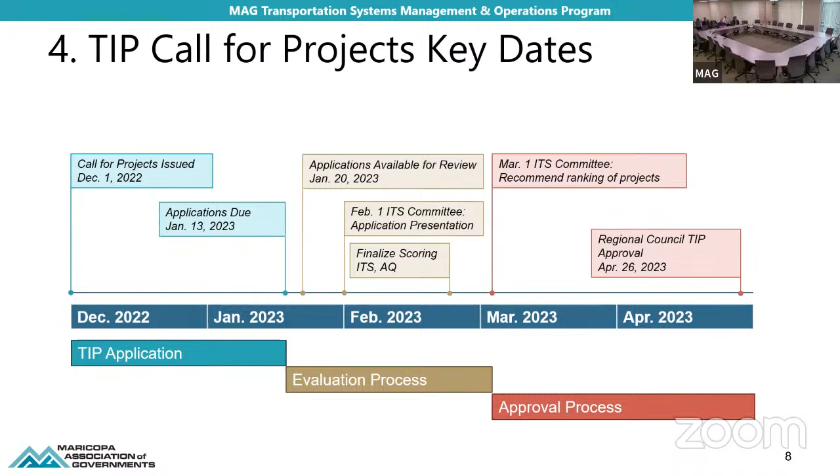The next item we have is our ICM planning study. We did provide an update last month in terms of what we are anticipating for our ICM, or integrated corridor management planning. We've had this funding available for planning studies, and we're taking a two-phase approach, where phase one will help us better identify feasibility of being able to do ICM projects or planning for those. And that could include signal timings and rerouting, a concept of operations type of approach.

But we also want to learn from taking a feasibility scan through the region to see what makes the most sense to do, as opposed to self-selecting corridors. So what we learn from phase one will feed into phase two, which is really the planning and executing of these type of planning projects.

We've currently developed our phase one task order, and we're waiting for final signatures on that. So that should be ready by the January committee meeting to discuss. But that project will be a very quick turnaround, and it's just a data scan. What goes into that task order indicates the three major tasks of this scope of work, or this upcoming task order.

Task one would be a regional assessment, just taking a look at it from a data perspective, both regional data as well as some safety data. Looking at the region, snapshots over time of what the data indicates in terms of hotspots or areas we want to be aware of from freeway and arterial management.

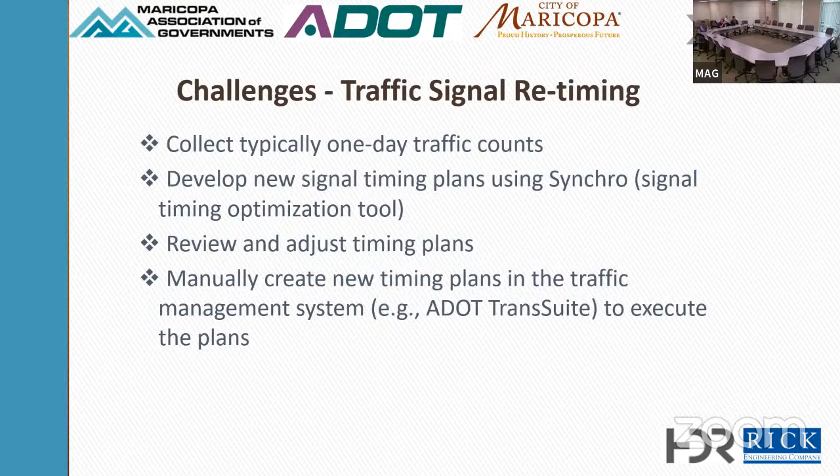So as part of the MAG Emerging Technologies pilot, this solution was looking at something that can help with this.

So what is this technology? Well, in the MAG region, you have four types of signal control. You have some signals that run free, some signals that are traffic responsive and use things like dynamic max green. And most of the signals, about 90% in the MAG region, use time of day coordination, and about 10% are adaptive.

So this technology sits right under the time of day coordination, in the sense that it is continuously collecting turning movement counts for you. It gives you the tool and the ability to optimize whenever you want, but it still gives you time of day coordination, and it's not making any decisions for you automatically.

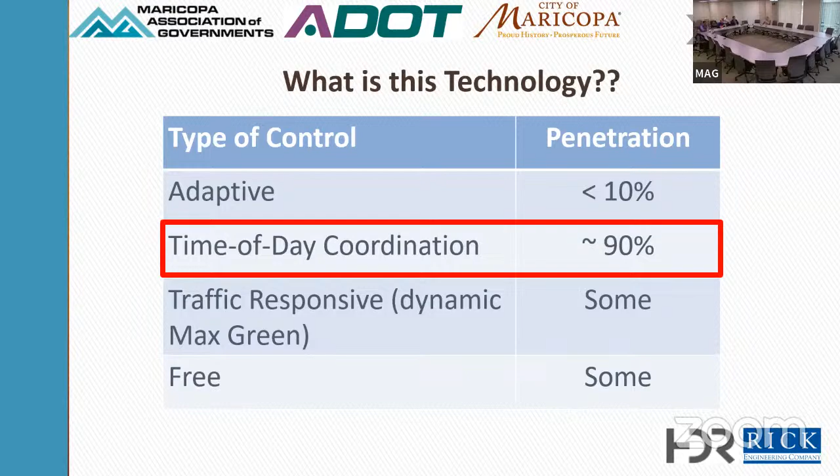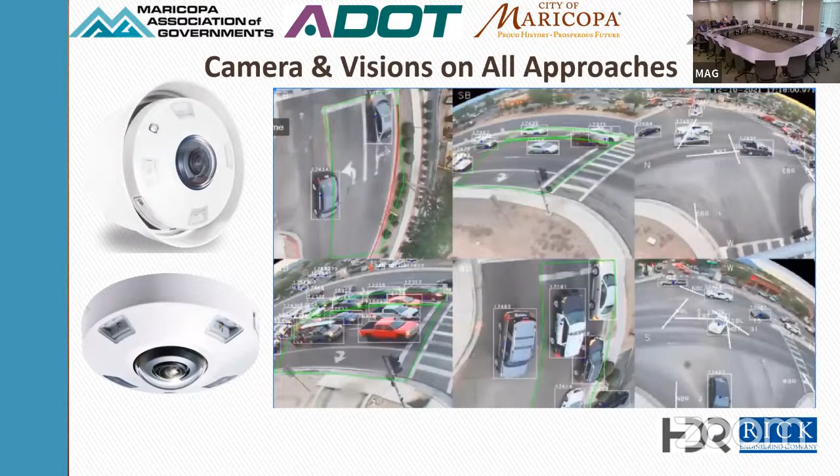So this technology uses camera and vision on all approaches to set up detection zones and track vehicles and objects. It's all powered by a main GPU unit connected in the traffic signal cabinet. This unit processes and stores the continuous traffic counts and is connected to the signal controller as well, giving you the ability, and ADOT in the case of our project, to automatically implement the timing plans remotely.

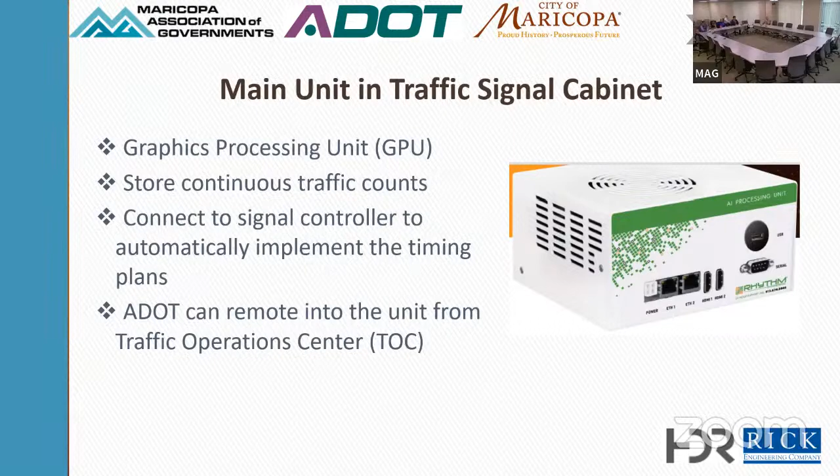This Code Green software that comes with this technology and these devices is like a signal optimization tool, but on steroids. First, you're always getting the continuous turning movement counts imported into it, so you're able to compare, identify when your peak periods are, and notice if there are any changes that happened that you might want to make adjustments to.

You can also monitor the cameras at the intersection directly from within the same software. On top of that, it has the signal optimization tool built in as well. So you can simply select the period you're looking to optimize, or even better, now that you have continuous turning movement counts, you can average a few days together to present a clear vision of what's happening in the corridor over time.

So once you build the model, and in my opinion building the model in this software is much more intuitive and easier, you can just click the calculate button to provide you with a signal timing plan. In the case of this project, we were actually evaluating just the signal timing plan generated by the software without doing any manual adjustments to it. The only adjustments we did were revising the speeds based on what's happening in the field, and that's it. No changes to the time space diagrams or anything of that sort.

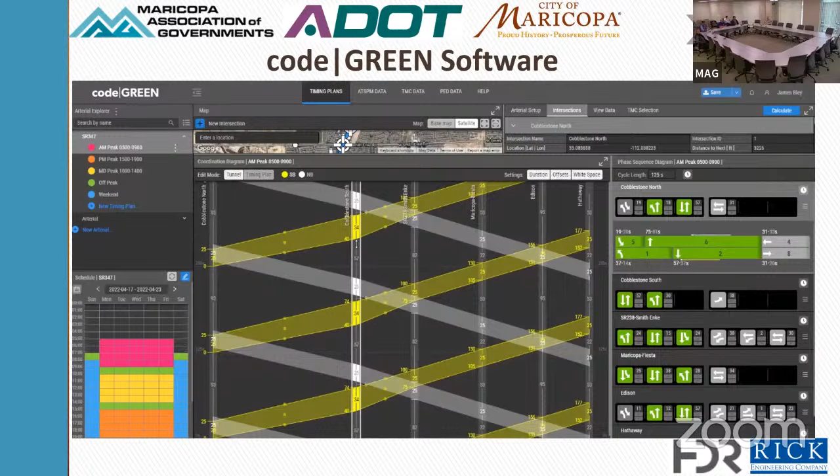So to summarize, this technology is AI-based cameras that count turning movement counts continuously. It has a module to generate time-of-day signal timing plans for you, and then a module to execute the signal timing plans. Kind of a one-click TSOP.

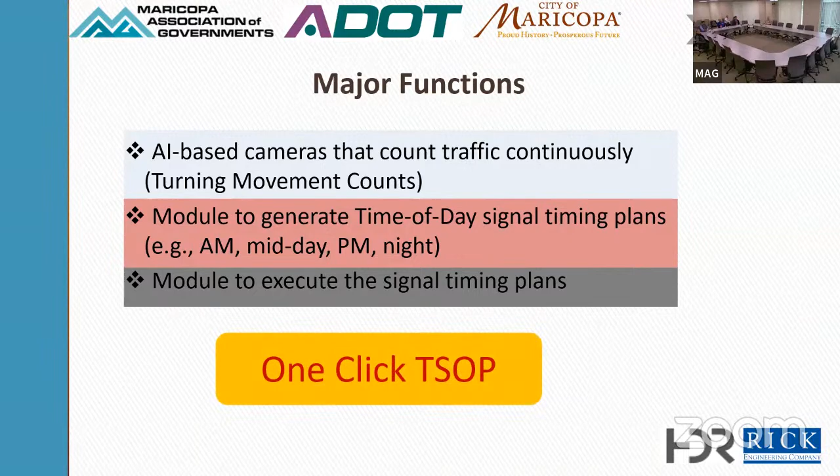This study was looking at evaluating the capability and effectiveness of this Code Green, or in other words, evaluating the performance of the generated signal timing plans. We did have simultaneously another project with Northern Arizona University looking at evaluating the presence detection and count validation of the AI cameras, but this study is just looking solely at the performance of the generated timing plans.

This project was deployed at 6 intersections on SR347 that were run by ADOT. I want to take a moment to really thank Bruce and the team at ADOT for making this project really easy on us and making sure everything ran correctly.

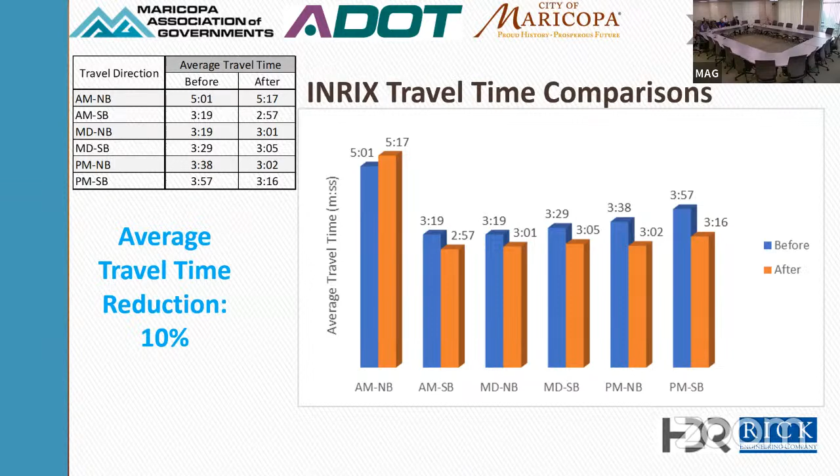Then when we looked at the INRIX travel time data, we can see a similar pattern. Northbound AM peak did not improve, but the rest of the scenarios showed improvement with the code green signal timing. Speed showed a similar trend overall — it actually increased speed for the entire corridor.

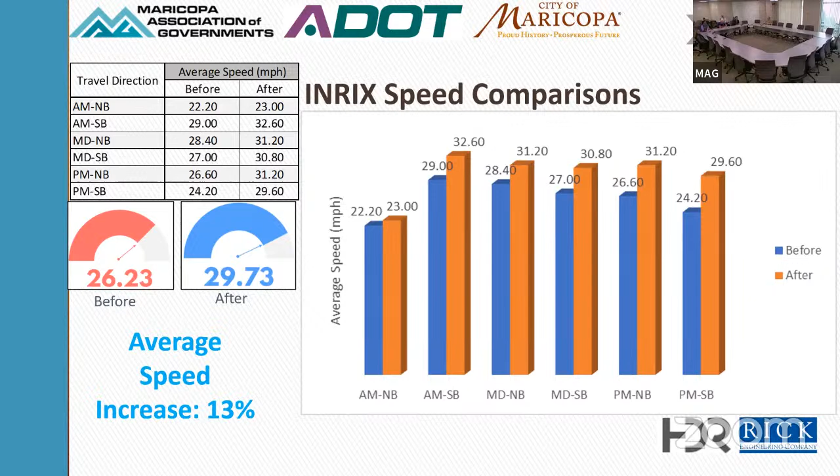One thing to note here: even though we saw travel time increase, the speed also increased, which doesn't make sense, right? But the way the INRIX collects data, the TMC segments, is a little different. Since it was not exactly aligning with the start and end of our travel time run, the speed data actually ended at one of the intersections there, so all the approaching delay was not accounted for.

A similar pattern appeared for the Wi-Fi detection. We found an overall 21% reduction in travel time with the system-generated signal timing compared to the previous or pre-existing time-of-day plans.

Once we did all that analysis, we did the TranSync travel time run-through, and this is just a snapshot of the before condition in the PM peak. We can see both northbound and southbound have significant stops there. In fact, when Omar and the rest of us were driving on the corridor, we realized the corridor needs some kind of attention.

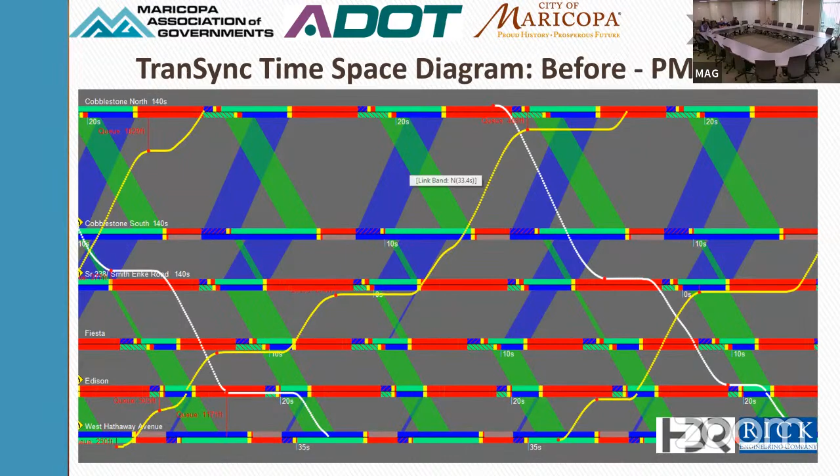So with the code green generated travel time, again with the TranSync developed travel time, we noticed a similar pattern in the AM peak northbound. Other than that, the rest of the scenarios had lower travel time compared to the previous before time window, and overall the travel time reduction was 22%.

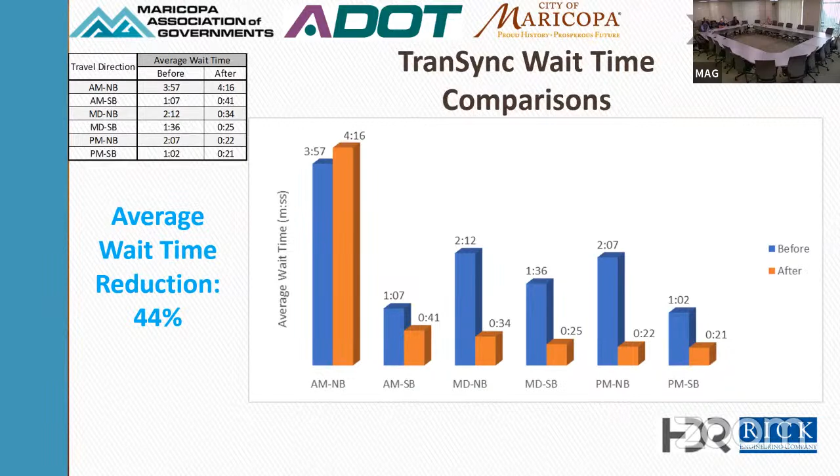The wait time is mainly the controller wait time. Again, we saw a similar pattern — the wait time also reduced across the corridor, and overall it was on average a 44% reduction in wait time.

Speed enhancement was there on the corridor, on average a 39% enhancement. Then number of stops — those are the stops at the intersections. Again, for the northbound AM peak, we'll look at what's going on in that scenario on the next slide, but for the rest of the scenarios we got fewer stops, meaning we observed smoother traffic flow on the corridor with the timing plans generated by the technology compared to the pre-existing time-of-day plan.

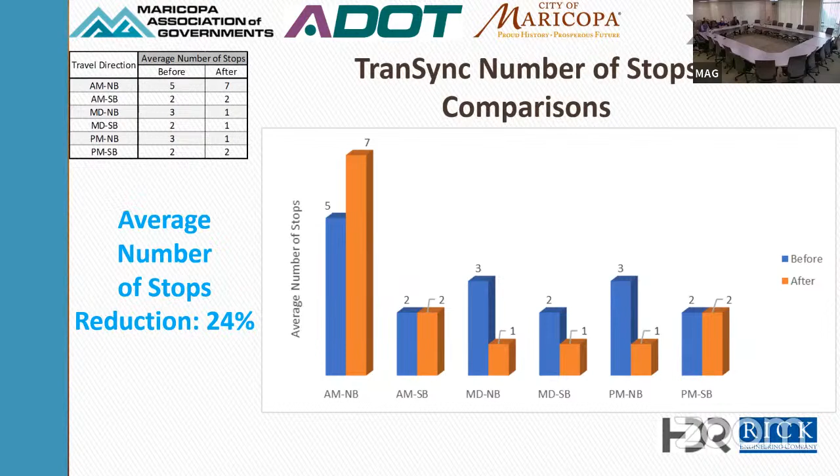Here is the after condition AM peak, and the third intersection from the top, that's Smith Enke. That was the intersection we identified. Even though this technology developed new signal timing, I think that's the ideal condition or ideal intersection to have a natural break there, because all the developments are along both sides of SR 347.

One thing to note is that, as Omar mentioned, we tweaked only the speed because the posted speed limit was not followed by all the drivers. So when we observed the speed, we tweaked that into the system, then did the new timing plan we implemented.

We did a before and after study. When we saw this one, Reggie from Rhythm Engineering, Bruce from ADOT, and us, we all looked at this and said, let's see what else we can do there. So manually, we did some tweaking, and later we found significant improvement. We saw another 10% or 18% enhancement after that manual tweak on the north portion of the corridor only, just a couple of intersections.

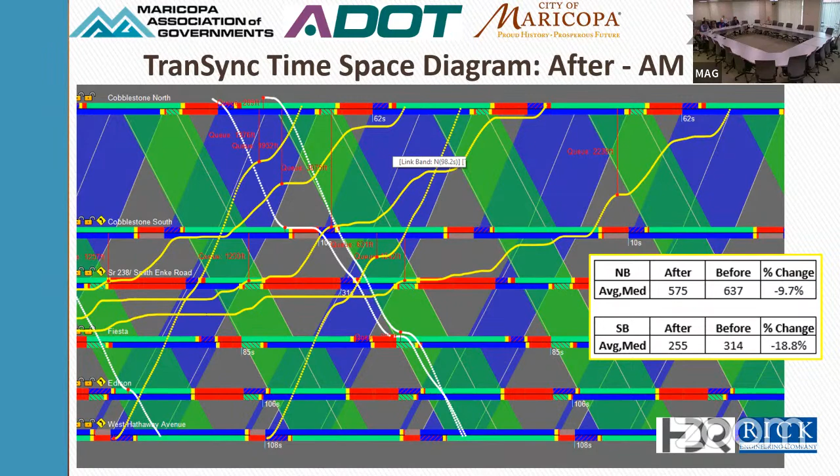But that also teaches us something, that the system is not truly turnkey. You still need a PE, traffic operations engineer, right? It's a substitute for Synchro. It helps, eliminating a lot of stuff that Omar mentioned before. It has all those advantages, but you still need a traffic operations engineer just to make sure everything is working, or whatever tweaking you need to make it smoother or improve the corridor.

Again, as I mentioned before, we input all the TMC data and signal timing into Synchro, and we did that before and after comparison, and we saw travel time reduction and number of vehicles in dilemma zone reduction. One thing to note is that has a good side effect because it enhances safety, correct? Then obviously fuel consumption and emissions are directly related to travel time and speed or number of stops.

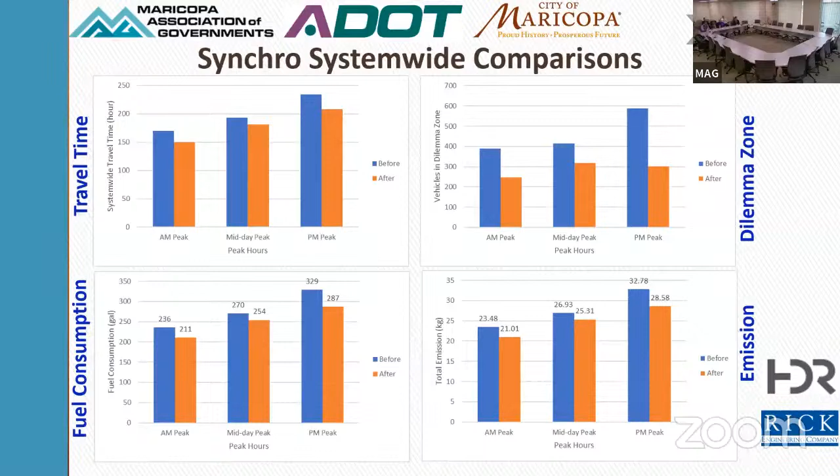Now the fun part. For benefit cost analysis, in this bullet point we documented all of our assumptions, which include truck percentages, travel time, unit cost for a regular person, the people driving the truck, vehicle occupancy, fuel cost, life cycle, and inflation rate and everything. One thing to notice here, the project life cycle, we assumed 10 years, just to be consistent with the HSIP applications we have been developing. And for inflation, we used an 8% annual interest rate.

So again, the benefit was reducing travel time, reducing fuel consumption and emissions, and all those. For a typical weekday, we estimated about $2,000 in benefit. Out of 365 days in a year, we excluded some holidays and also all the weekends, and just assumed 250 days as the effective weekday count. Our analysis showed a little more than $500,000 annual benefit from this timing plan.

In terms of the cost components, we included the agency project management time, the contractor fee, the vendor's fee, the fee needed to purchase or procure the technology, and all those. Then also, as we saw, we need another engineer looking at the signal timing data, feeling comfortable implementing those, observing, and maybe tweaking here and there. So we incorporated a fee for consulting service too.

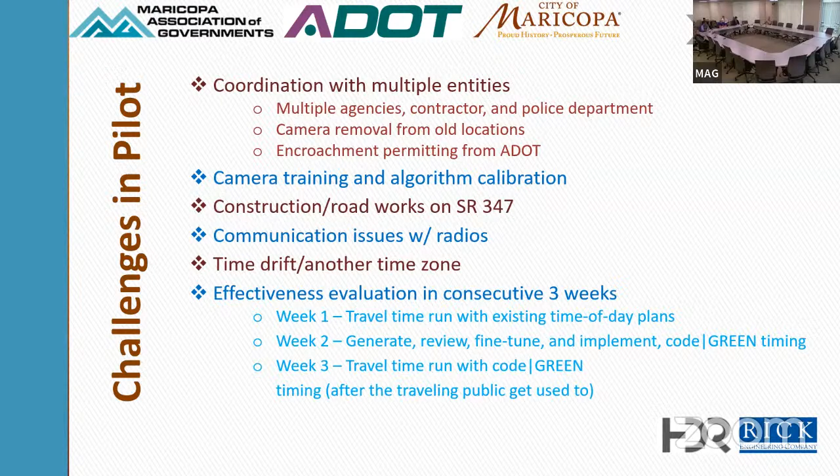And again, those challenges make our life colorful. That's why you can see that colorful there. And once you have a solid team, you can do anything basically. So we did overcome all those challenges, and as Omar mentioned, we had a great, successful project.

The agency feedback, you can see here the agencies. By agency we meant mainly ADOT, and we wanted to get their brutally honest feedback on how we did as a consultant, how the technology vendor did, and overall how the technology would help ADOT, or the adopting agency, in their day-to-day life. Overall, we got really positive feedback there. With that, I would like to hand it over to Omar. Thank you, Sanjay.

And I'd just like to elaborate on one point from the driving experience as well. This is something you can't really put in a benefit cost analysis, but from the driving experience, seeing the stop duration, feeling the stop duration actually decreasing a lot, it's a lot easier, and driver frustration is a lot less as well. But yeah, with that, I'll happily take any questions for Sanjay and I.

Were you and your team able to identify any root causes to why the morning northbound traffic was adversely affected, whereas everything else was a positive effect?

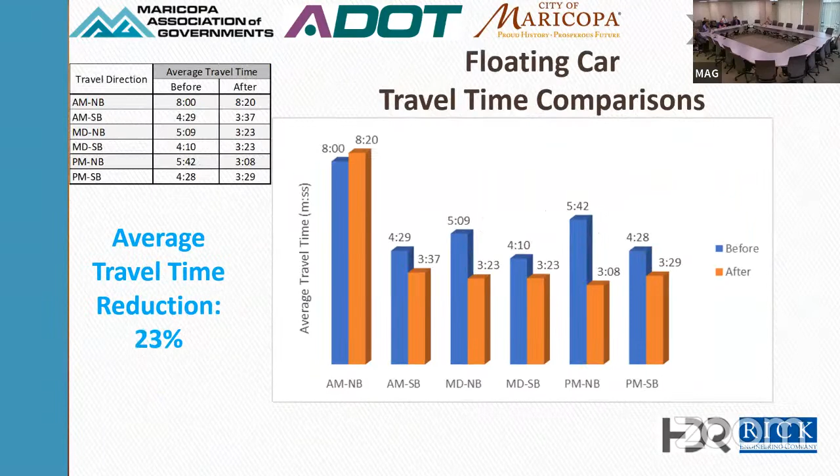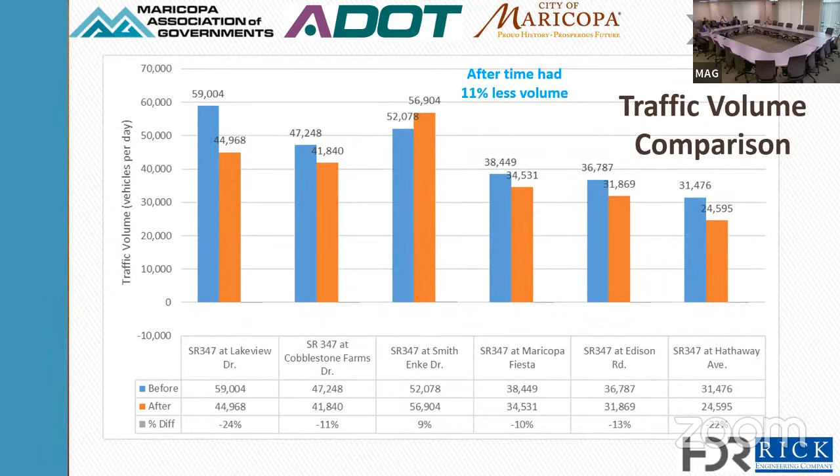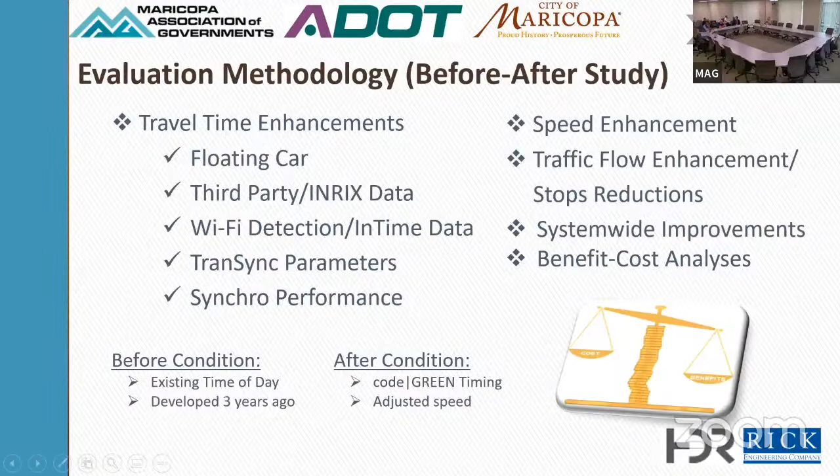While the slides are loading - SR 347 is the main corridor to and from the city, that's the spine. If you look at, for example, the Cobblestone Farms intersection, the side street is just collecting all the commuter traffic and feeding it onto this main spine. Only the right street extends a little bit longer. So again, this is not a typical grid system that we have in the valley - rather, this is just the main corridor, and all the side streets are just feeding traffic onto the main street.

With the side streets specifically, we did a system-wide evaluation using Synchro before-and-after data, and we saw improvement there in terms of system-wide travel time, number of stops, delays on vehicles, fuel consumption, emissions - all those. Other than the Synchro analysis, we didn't do any other estimates for the side streets. Okay, thanks.

Mr. Chair, Sanjay - I guess this kind of leads from some of the other questions, but I think that's the beauty of this being a pilot from the Emerging Technologies Program. If there's added interest, leaning to what Kathy from Tempe is mentioning, we can apply this to maybe a different kind of corridor. The system, I'm assuming, is supposed to take input from the side streets in terms of balancing.